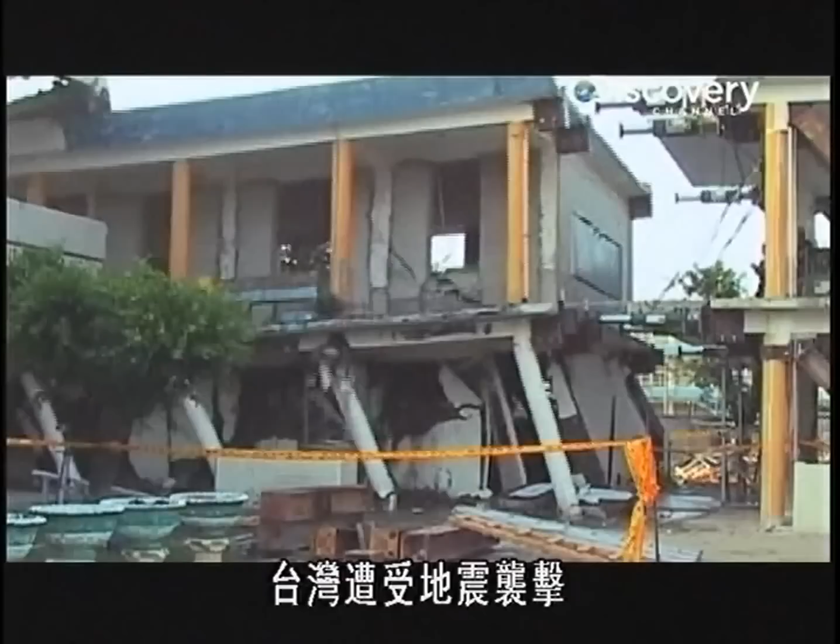Taiwan is under attack. Unpredictable forces of nature threaten the ambitions of this Asian economic giant. To fight back, the island's best minds race to deliver innovative ideas.

High-tech factories that manufacture ultra-safe building blocks and assemble them ultra-fast.

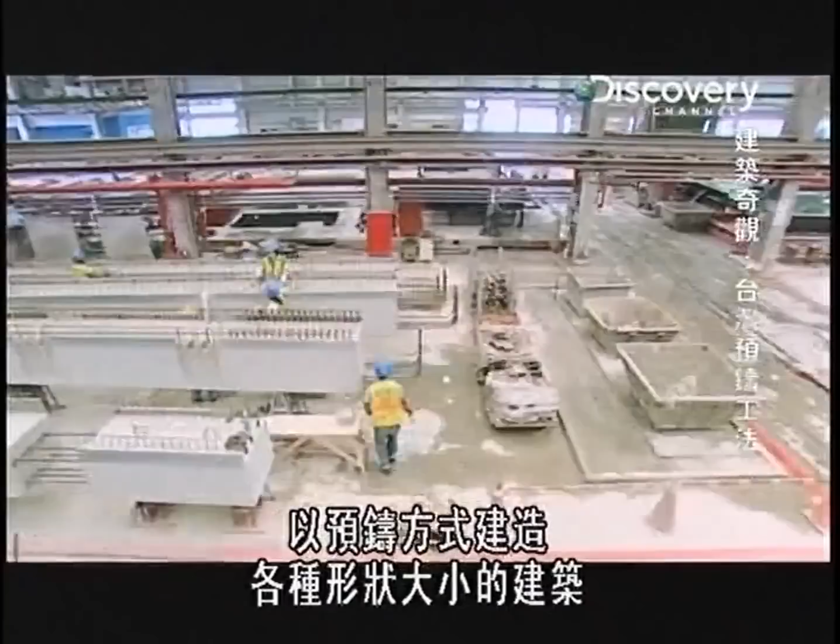Now, Taiwan's unconventional construction method faces its ultimate test: how to prefabricate buildings of all shapes and sizes. A billion-dollar high-tech factory, a 22,000-seat stadium, and a towering 38-story residential block.

Tempestuous weather, near impossible deadlines, and the constant threat of earthquakes combine to make the engineer's job even tougher. This is like Lego, but it's a million times harder and bigger. If they succeed, Taiwan's prefab magic will become a man-made marvel.

Taiwan, a mountainous island more than 30,000 square kilometers in size, home to 23 million people. Rapid industrialization in the late 20th century transformed it into an Asian economic giant. Its foreign reserves are now among the world's largest.

But Taiwan's growing economy is vulnerable. The island is continually attacked by one of nature's most destructive forces, earthquakes. We have about 200 earthquakes of magnitude 5 every year, and then perhaps we have an earthquake of magnitude 6 about every 3 or 4 years.

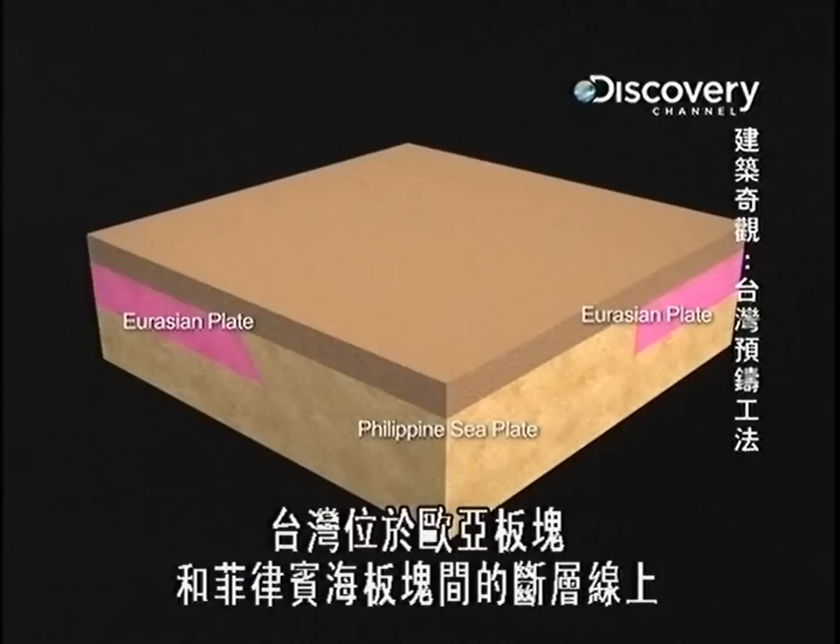Taiwan's geological instability is due to its position on the Earth's crust. It sits precariously on the fault line between the Eurasian and the Philippine Sea plates. Constant movement between these two creates powerful shock waves, producing the many earthquakes experienced by Taiwan, dangerously exposing its densely populated cities to potential devastation.

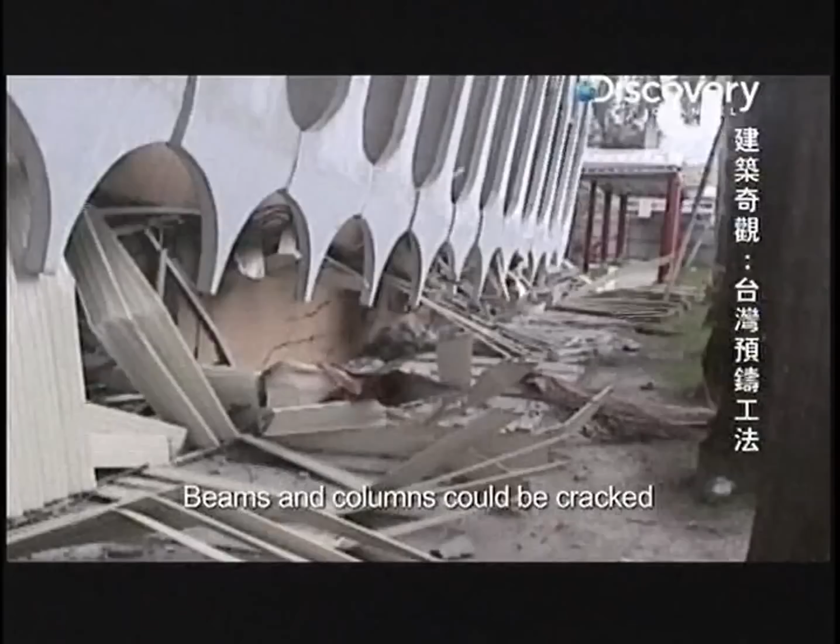Many buildings may not be sufficiently strong enough to resist the earthquake force. Beams and columns could be cracked, and even more seriously, buildings could collapse, causing loss of lives.

September 21st, 1999: Taiwan's worst nightmare came true. A massive earthquake, more than 7 on the Richter scale, strikes the small town of Chi-Chi. It's so powerful that it even rocks Taipei. In the end, more than 2,000 people lose their lives. The disaster, named the Chi-Chi earthquake, cost Taiwan around $9 billion in infrastructure damage.

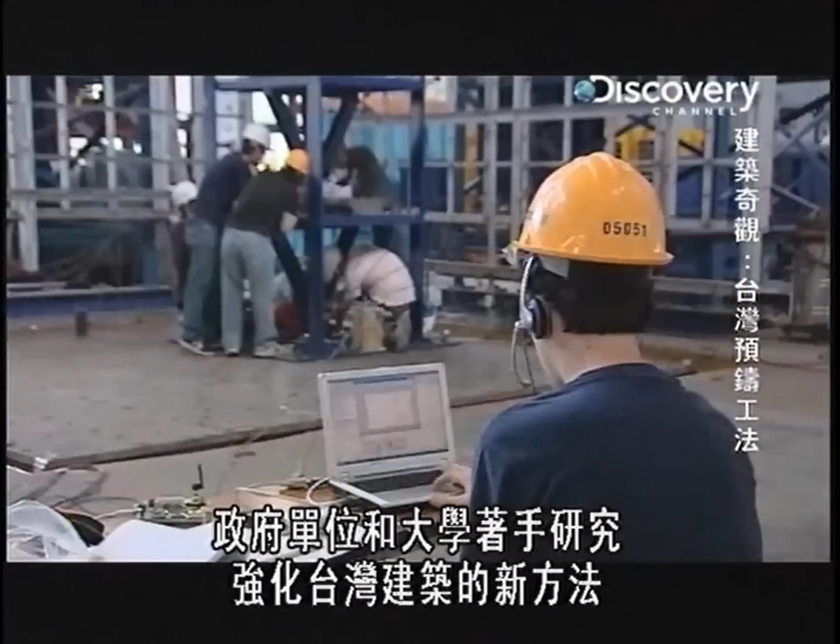Coming up with stronger building methods is now Taiwan's immediate priority. Government agencies and universities begin exploring innovative ideas to strengthen Taiwan's buildings. Multi-million-dollar city icons like Taipei 101 spare no expense to arm themselves with state-of-the-art anti-earthquake devices.

Amongst the many individuals working to create unique solutions is engineer Dr. Samuel Yin.

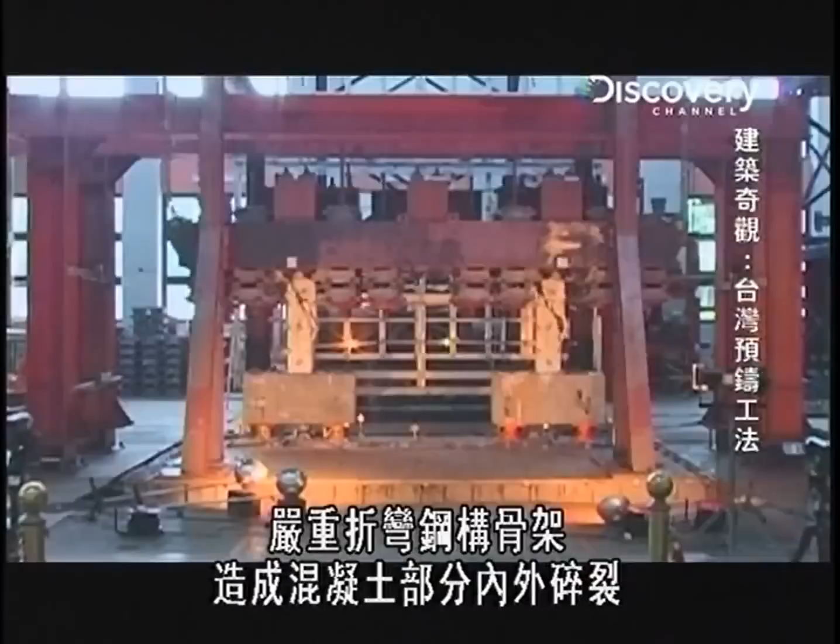Dr. Yin is quick to identify the source of a building's vulnerability when facing an earthquake: it's columns and beams. An earthquake attacks them with its powerful lateral movements, violently bending their steel skeletons and causing the concrete bodies to shatter inside and out. As soon as they collapse, the building they hold up is as good as finished.

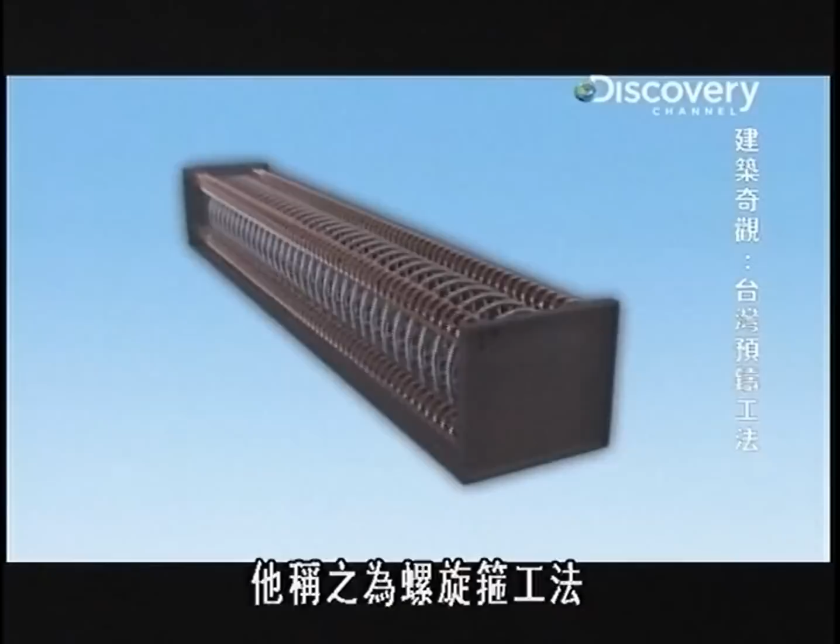The Yin Spiral is twice as stiff to keep its shape during the fiercest quakes. It can also dissipate energy more evenly to keep the concrete around it intact, preventing the building it supports from collapsing.

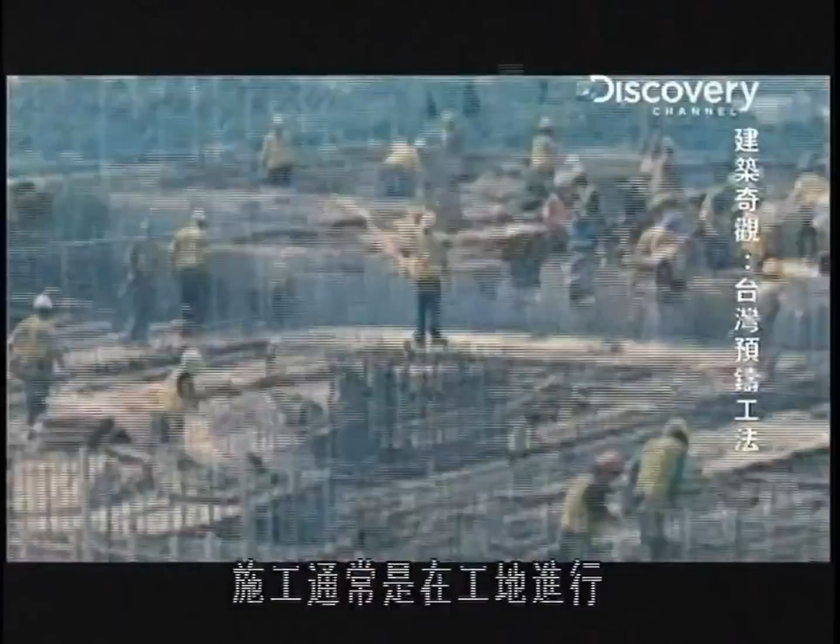But turning Dr. Yin's unique design into a reality is easier said than done. Construction normally takes place on-site, exposed to erratic weather conditions, and prone to human error.

Dr. Yin turns to the magic of prefabrication, or prefab construction, for a faster and more accurate alternative. Unlike traditional construction, prefab takes place indoors where the climate is controlled, making the work super fast and hyper efficient.

The finished building blocks are then assembled rapidly on location. It's like putting together a mega Lego set on steroids.

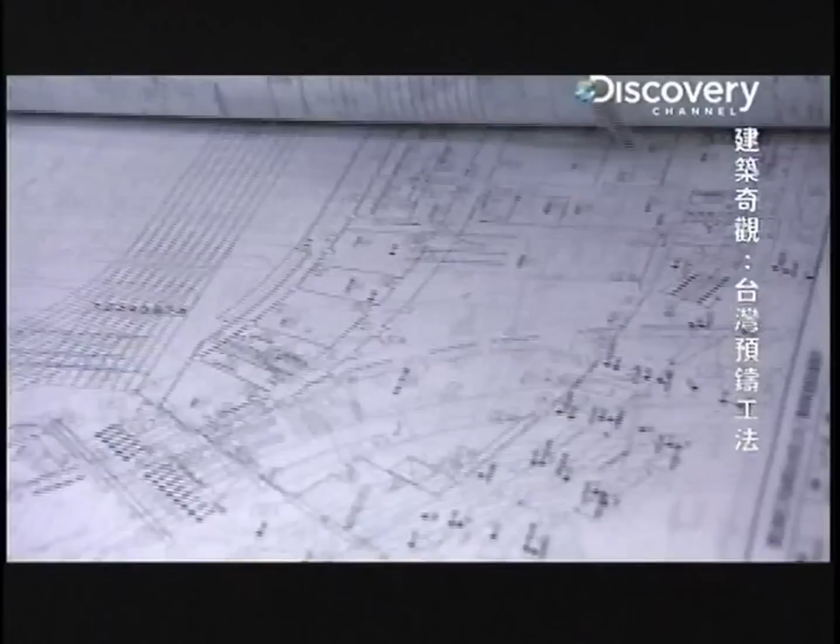Tough deadlines, the unforgiving Taiwanese terrain, and the threat of typhoons will take engineers to breaking point. Will success seal their reputation as Taiwan's genius builder?

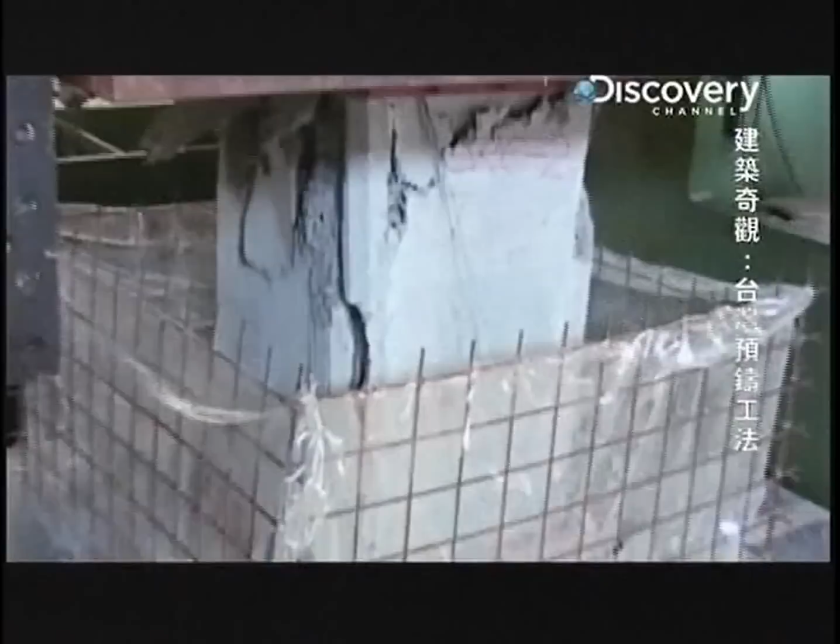Taiwan, home to one of the world's largest prefabrication factories. The giant work floor, 10 soccer fields in area, manufactures concrete blocks for mega buildings, ultra fast and ultra strong. Unlike conventional structures, these prefab buildings can also withstand the most violent earthquakes.

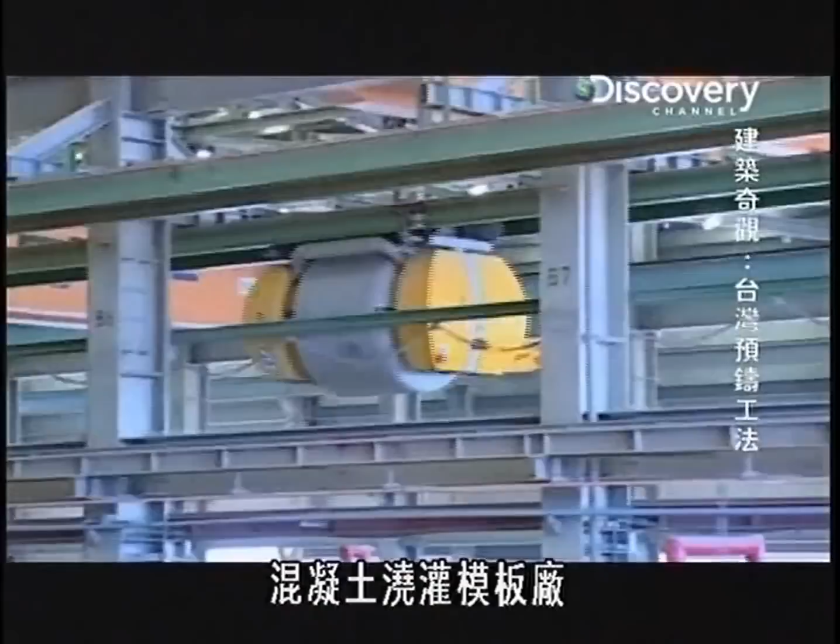The secret to this factory lies in its finely tuned 3-stage process. The steel shop, where high-grade steel is cut and bent into shape. The assembly line, where the steel skeletons of prefab building blocks are put together. And a concrete casting and molding facility, where the mega building blocks get their final shape, ready for delivery.

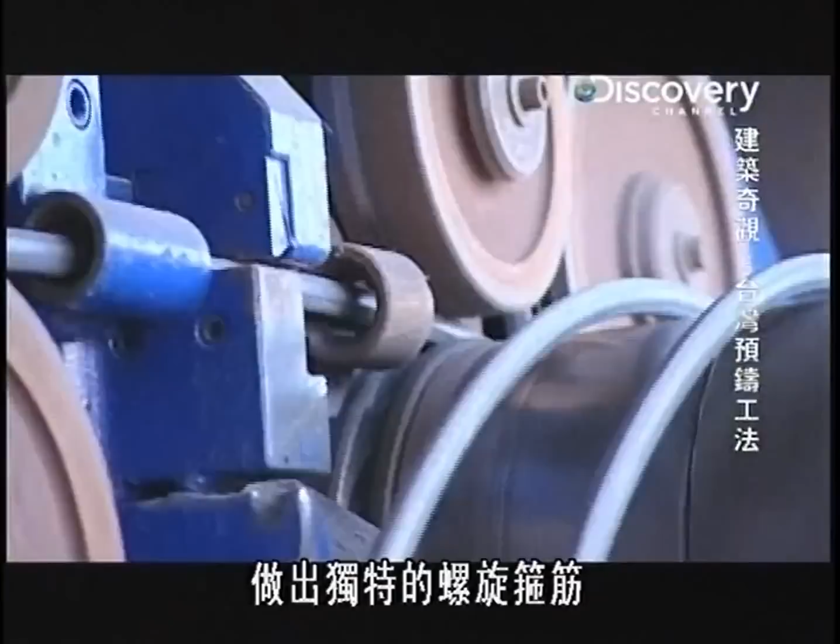Operational efficiency is crucial. But it's the ingenious machines that give production an edge. Giant spring manufacturing equipment churns out unique steel spirals that form the skeleton of columns and beams. It's an eco-friendly process that reduces the demand for raw steel by 30%.

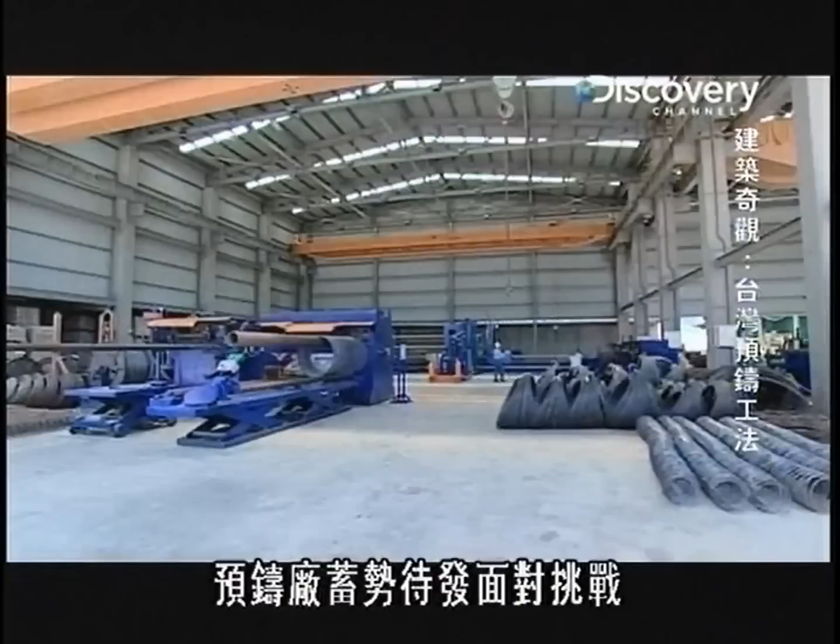The factory is geared up for the challenge ahead. Time now to turn theory into practice. Are they up to the task? To prefab 3 massive buildings of different sizes and shapes in record time. The Taipei Stadium, the 38-story Ocean Blue condominium, and the largest of all, the 600,000 square meter Innolux plant.

Innolux is a homegrown liquid crystal display manufacturer in Taiwan's rapidly growing IT industry. The billion-dollar business is one of Taiwan's most important exports. For companies like Innolux to stay competitive, they require high-tech factories to assemble their sophisticated products. The faster they get their factory built, the earlier they can generate income.

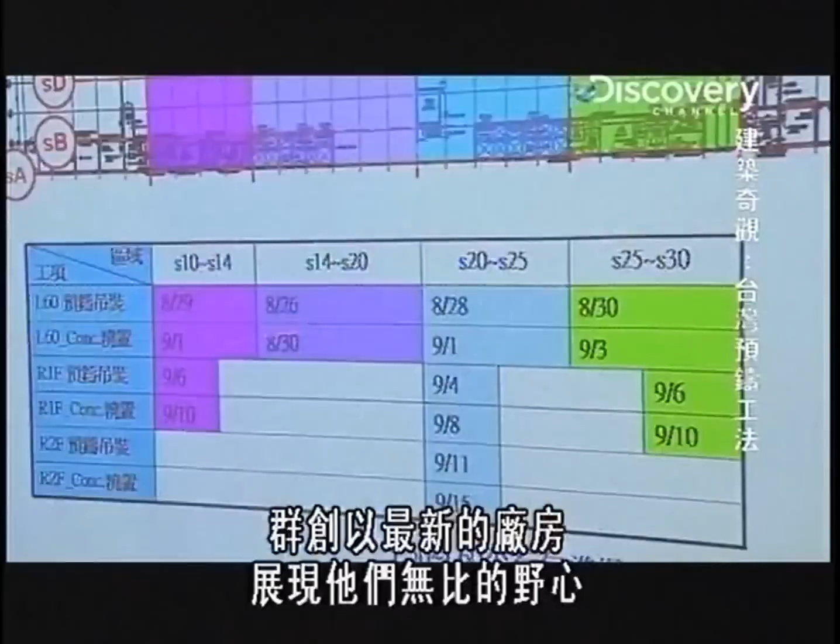Innolux's latest factory is their most ambitious to date. In 12 months, engineers have to complete the building and also make it earthquake-proof to protect the factory's sophisticated equipment. It's a punishing set of challenges that no standard building methods can meet. Except for prefabrication.

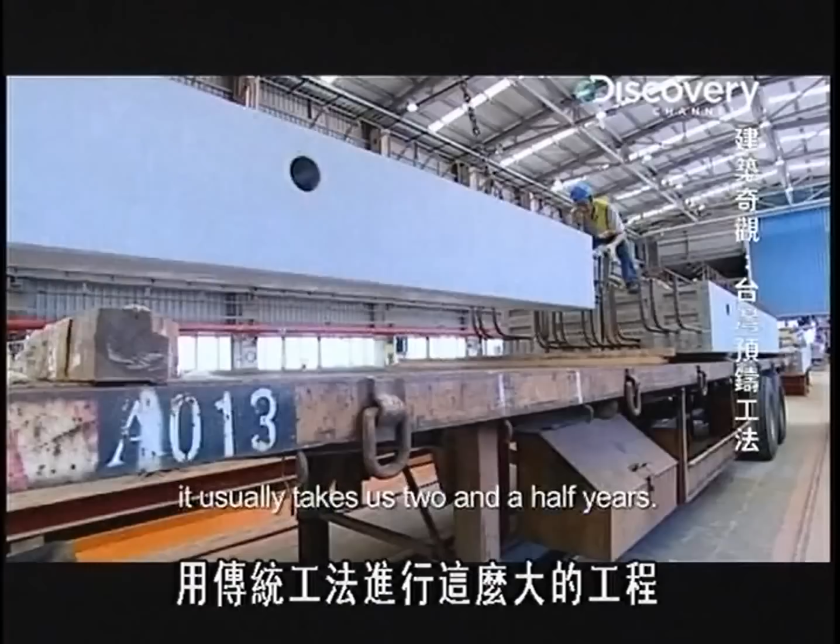Here we have the rebar cage. Engineer Mo is in charge of constructing a building that's up to the job. You know, in the conventional way, if we want to build such a big project, we usually take 2.5 years. Now we only take 1 year.

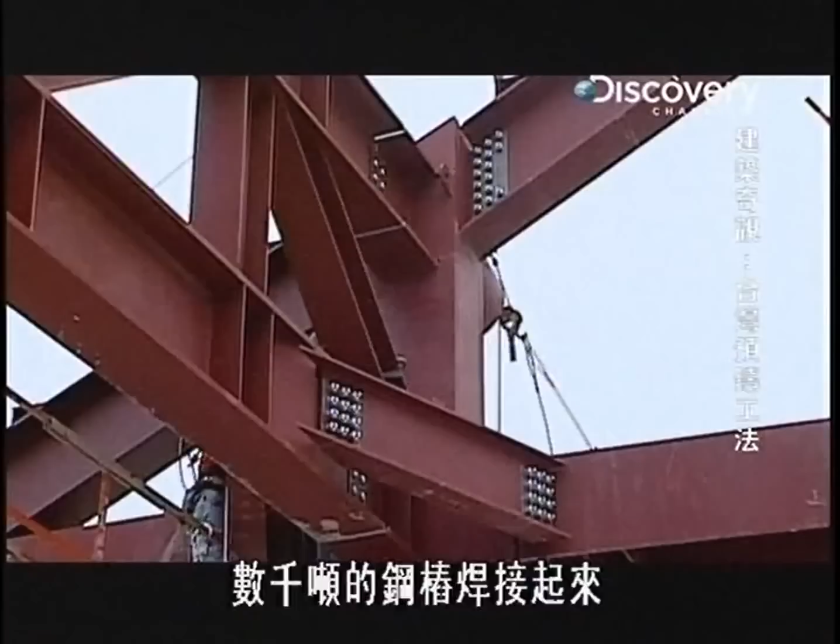Work starts on the plant's massive foundation. Engineers excavate a gigantic area measuring 100,000 square meters. Thousands of tons of steel piles are welded together to form the building's 6-story framework. But these are the easy parts. The biggest challenge is to tailor-make the floors of the plant's largest cleanroom facility.

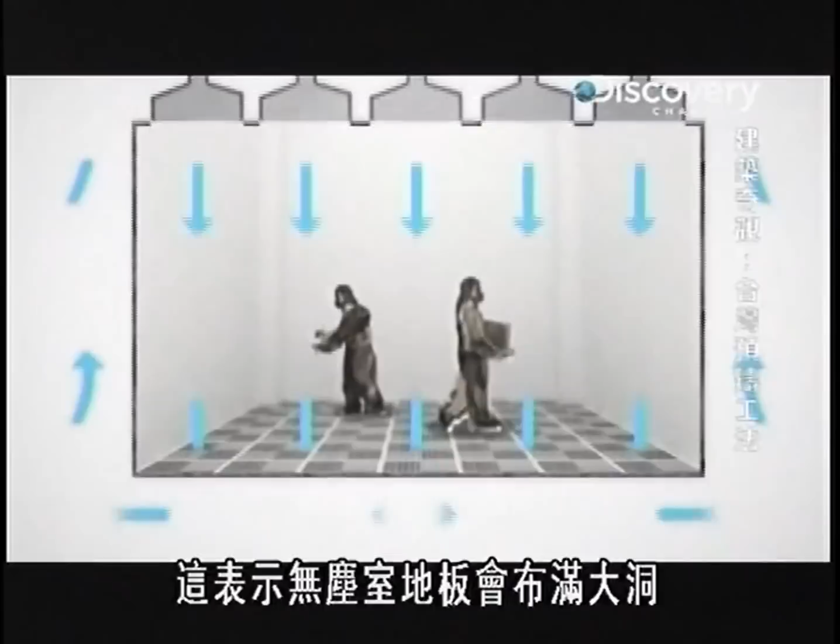Cleanrooms are the most important part of the factory. They prevent environmental pollutants like dust or microbes from ruining the microchips that Innolux manufactures. Inside, a filtering system controls air contamination levels through multiple ventilation points built into the floor. This means that cleanroom floors are riddled with large holes. So how do you construct a giant floor filled with hundreds of holes while making it earthquake-proof?

The engineer's plan is to split the cleanroom's 48,000 square meters of flooring into 1,800 smaller sections, making them easier to prefabricate. Then, to strengthen each piece, they will double the amount of steel and concrete. At the same time, a massive net of steel will form the frame of the floor, holding the pieces together. In this way, the customized floor is strong and stable enough to withstand the most violent quakes.

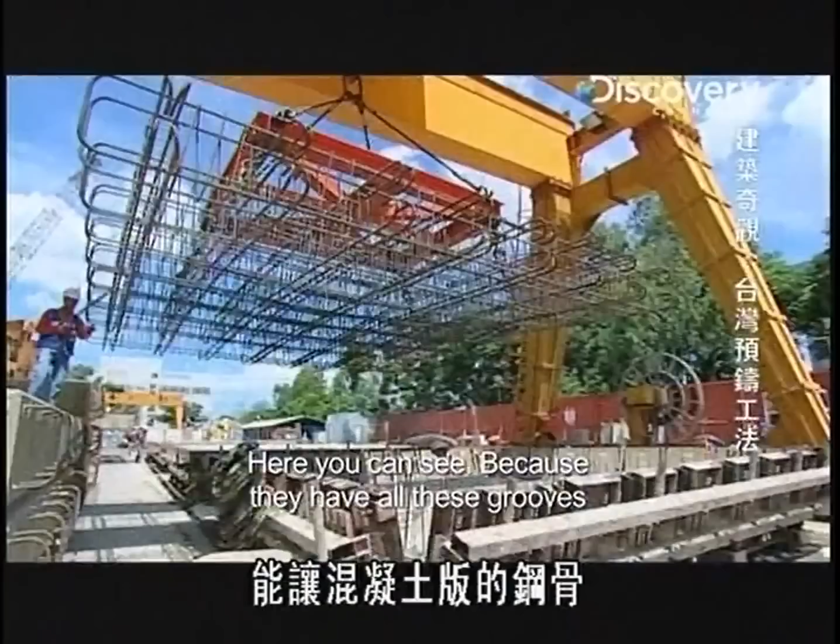With the perfect plan in place, the prefab factory now needs to build the perfect floor. First, a crack force of craftsmen binds the steel skeleton of each floor slab together. The work is fast-paced and done entirely by hand. And then we put this skeleton inside of the mold. Here is the mold. Here you can see they have all these grooves, and all the skeleton of our concrete slab will be fixed into the right location.

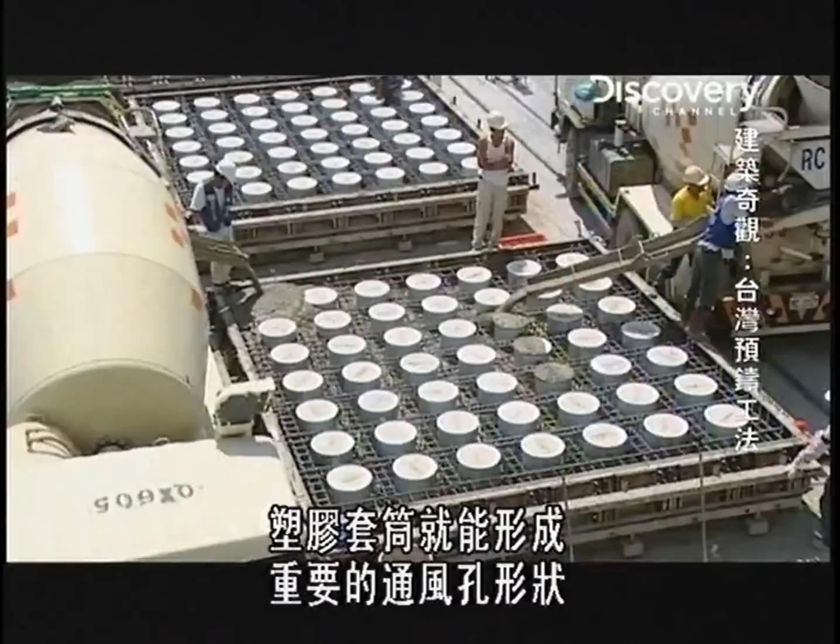After the skeleton is inside, we put the bucket inside here, and then we cast the concrete. As the concrete is poured into the mold, the plastic buckets help to form the shape of the vital ventilation holes. With just 22 molds, the factory is able to prefab all 1,800 floor pieces in less than 3 months. And because we have to insert all these tubes to get the ventilation, it looks like a cheese, so we call it cheese slab.

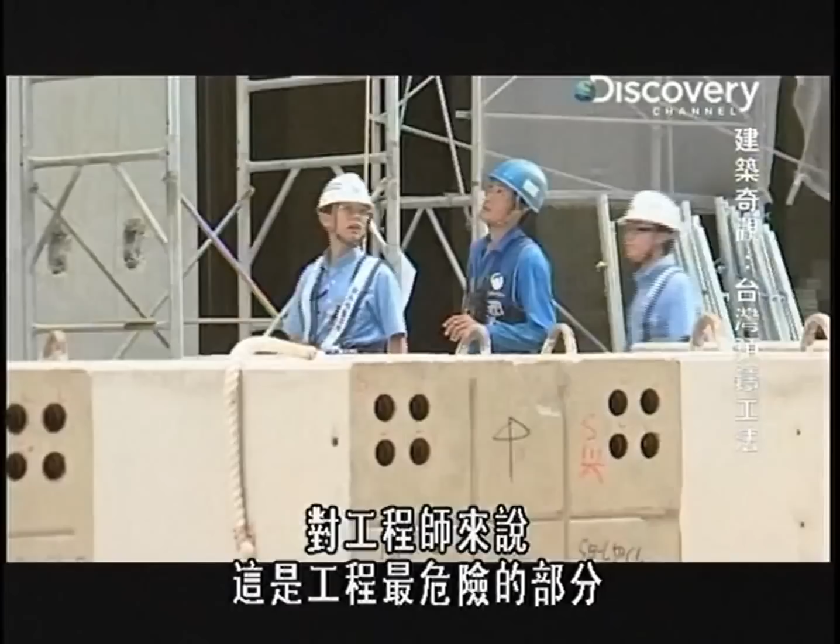The last stage of the process is to install each of the 25-ton floor slabs. Not on the ground floor, but 4 stories up. For engineers, it's the most dangerous part of the construction. The most dangerous thing is, you can see, for this 25-ton slab, we have to lift it up to about 30 meters height and insert it into the about 10 meter narrow gap.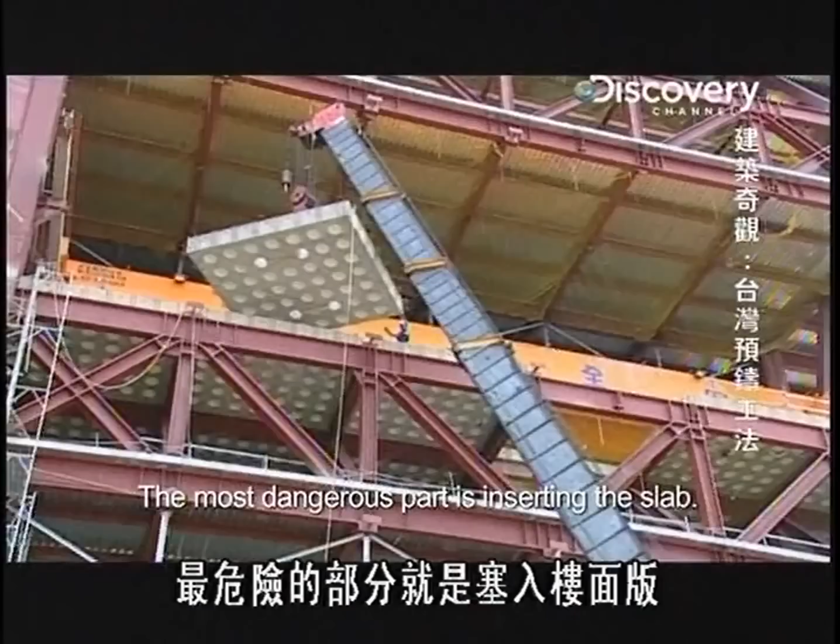You can see, now it's up to the right floor, and we have to get that one into that one. The most dangerous part is inserting the slab. If it doesn't make properly, then we have a big problem. This is a big disaster. After a harrowing half an hour, and with only inches to spare, the slab rests safely at the top and is moved into position.

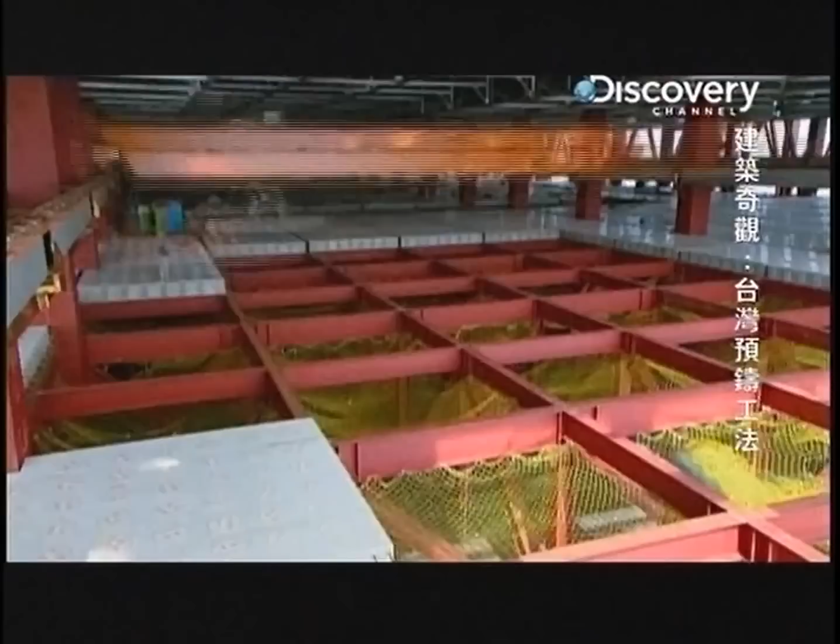Over 10 months, engineers install thousands more floor slabs and put the finishing touches to the factory. Completion of the project is at last a success. This is an exciting experience for me because we had to finish this big project in such a short time. And the precast helped us to accomplish this mission.

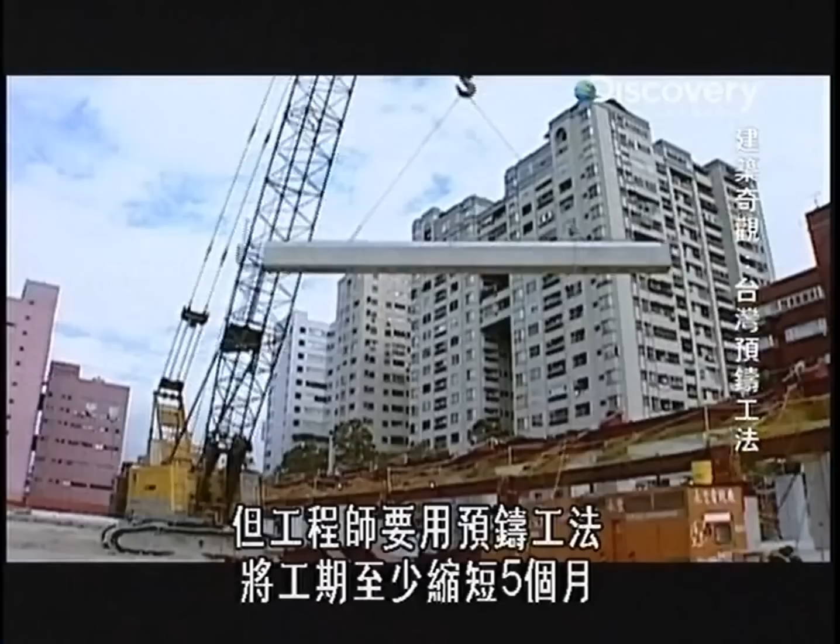With the Innolux plant completed, engineers turn their attention to another mega project, the $70 million Taipei Stadium. It usually takes over 30 months to build a stadium this size. But engineers are going to use prefab to shave more than 5 months off the schedule. If they succeed, it will be the fastest stadium ever built in Taiwan. Only one problem.

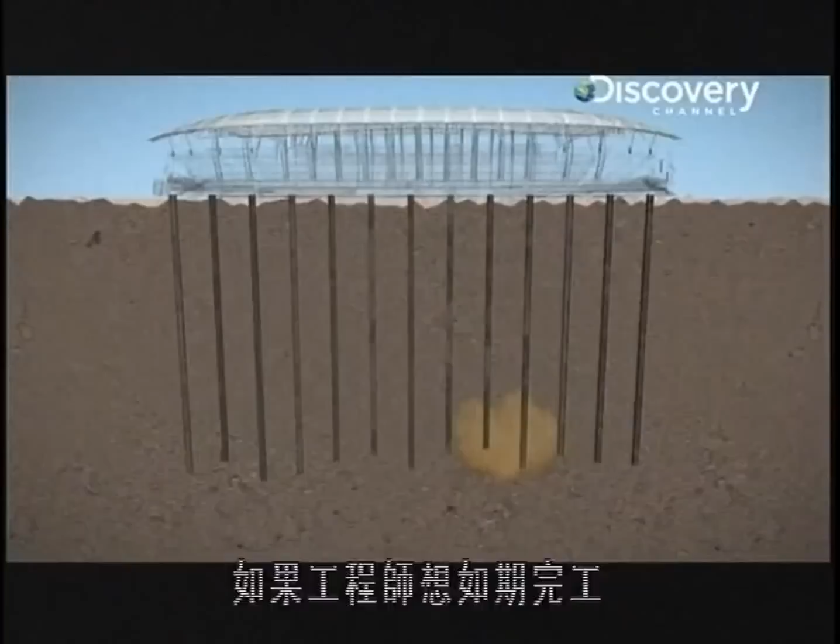The city of Taipei sits on some of the softest soil on the island. A condition made worse by an extremely high water table that rises during the annual typhoon season. If engineers want to get the stadium ready in time, they will have to prevent it from sinking into the ground.

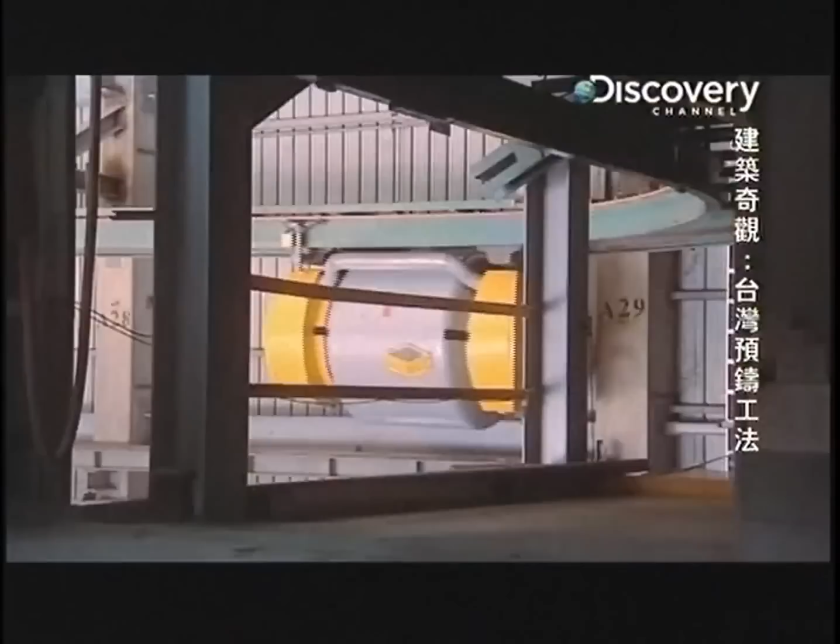Homegrown innovation has been the powerhouse that's propelled Taiwan into the future. The island's largest prefabrication factory is attempting its most ambitious projects to date. Constructing 3 mega buildings in record times. Engineers took just 1 year to complete the massive 600,000 square meter Innolux plant. Now they turn their attention to their next 2 missions.

The 38-story Ocean Blue condominium and the 22,000-seat Taipei Stadium. Commissioned specially for the 2009 Deaflympics, the stadium has to be ready in less than 25 months. It usually takes more than 30 months to complete something this big. If engineers succeed, they will make construction history. Engineer Zhang leads the project.

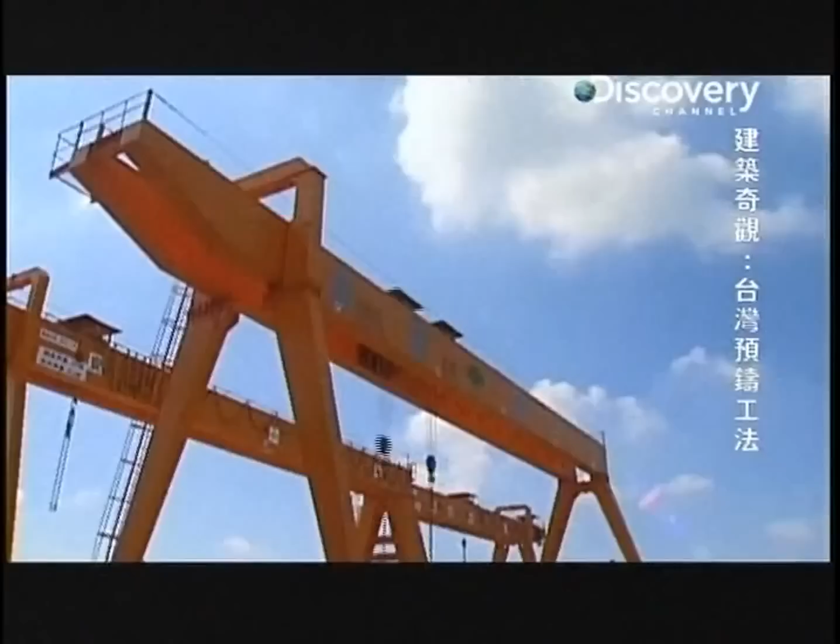Back at the prefab factory, engineers customize the stadium's 900 seating slabs. Specially designed molds of different sizes and shapes churn out the 15-centimeter thick parts. This way, 16 seating slabs can be completed in a single day. A feat conventional methods will find hard to beat.

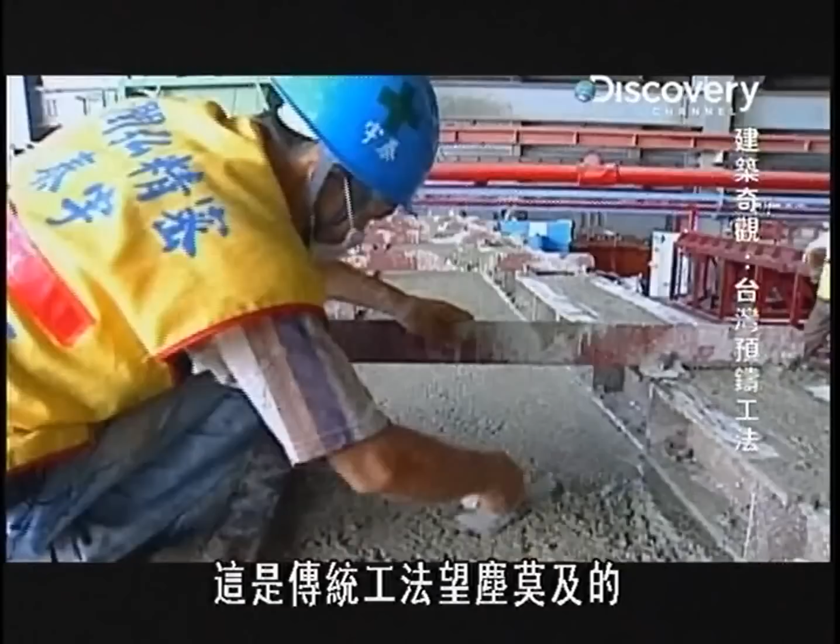More than 40 steel trusses are also prefabricated to form the stadium's roof, each weighing 35 tons. Everything is ready to be assembled. But first, engineers have to overcome a sticky problem that could ruin their foundation. Soft clay. This unstable soil underlies Taipei because the city sits on a basin. And as the basin is intersected by 4 rivers, the soil also suffers from a high water table, just 2 meters beneath the surface.

Complicating the problem even further is the threat posed by the engineer's deadliest foe: earthquakes. Because the city of Taipei has a thick layer of soft soil, when an earthquake comes, the earthquake wave will pass through this thick layer of soft soil, and some of the earthquake waves will be amplified. Therefore, the building built on this layer of soil could suffer serious vibrations.

For engineers to complete the stadium in time, they need a solution that will both stabilize their soft foundation and counter the threat of an earthquake.

Prefabrication can't help engineers in this situation. They need to come up with an alternative solution. One option is to drill steel foundation piles deep into the earth. But it's a time-consuming process, and the amount of steel needed makes it an expensive scheme. What's worse, an earthquake or a hidden pocket of clay could destabilize the steel piles, causing part of the stadium to collapse.

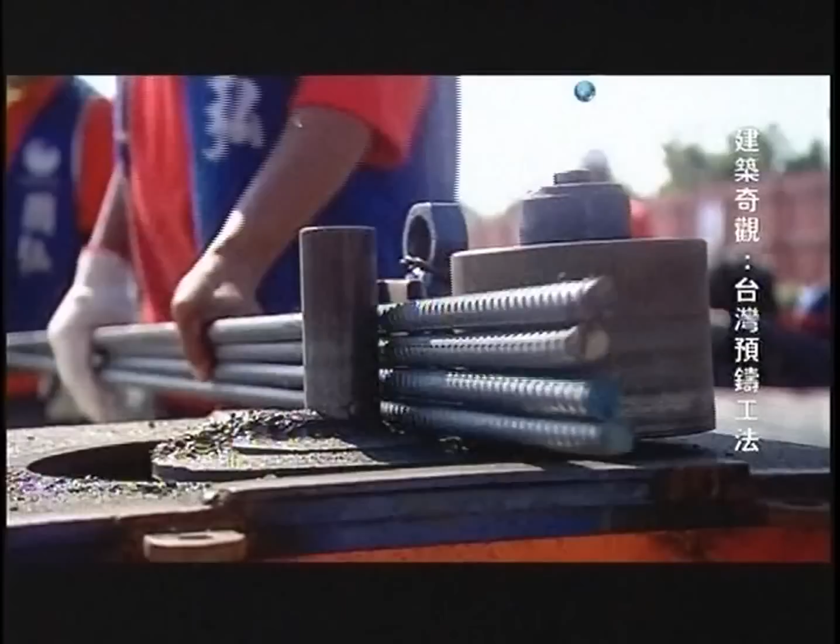Engineers turn to a conventional but highly effective technique to tackle both problems. Mat foundations. Engineers will excavate close to 5 meters down until they hit sand, a stronger and heavier material than clay. Then they'll place a bed of steel onto the sand, reinforced with concrete, creating a mat foundation.

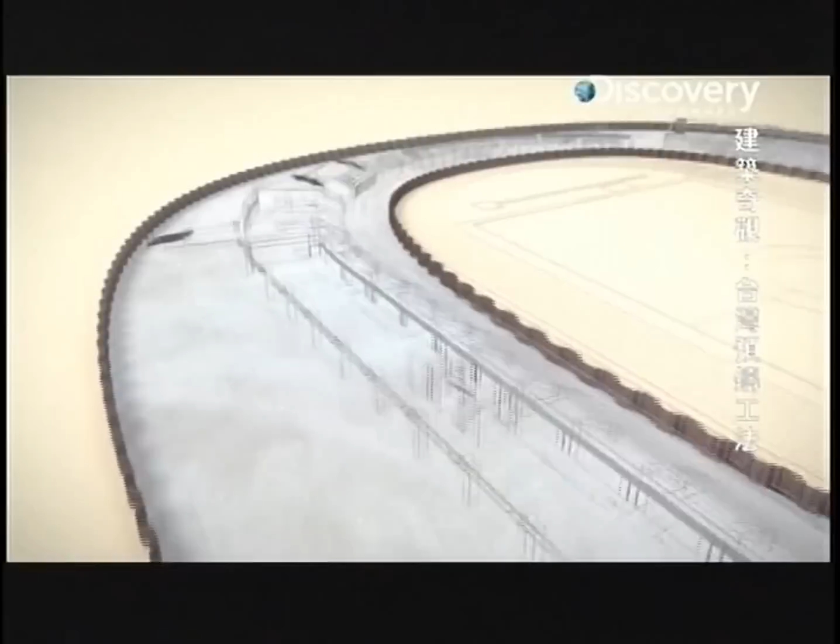By building countless mat foundations around the 600-meter circumference of the stadium, the weight of the structure is distributed evenly across and under the site, allowing it to sit undisturbed within the soft clay and high water table. Even if an earthquake hits, the stadium will move as one in the soft soil, just like a ship floating at sea.

Work begins. First, engineers construct a series of waterproof steel structures called cofferdams. These temporary structures surround the worksite with a wall of steel sheet piles, making it safe to work inside. Then they assemble the steel skeleton of the mat foundation. Workers pour tons upon tons of fast-setting concrete to give the foundation its final shape.

But before engineers can finish their work, disaster strikes. The annual typhoon season hits Taipei. A Category 2 typhoon makes landfall east of the city, causing flash floods and landslides, clocking wind speeds of more than 180 kilometers per hour. At the stadium, almost all the cofferdams are inundated with rain. It's a major setback for the crew.

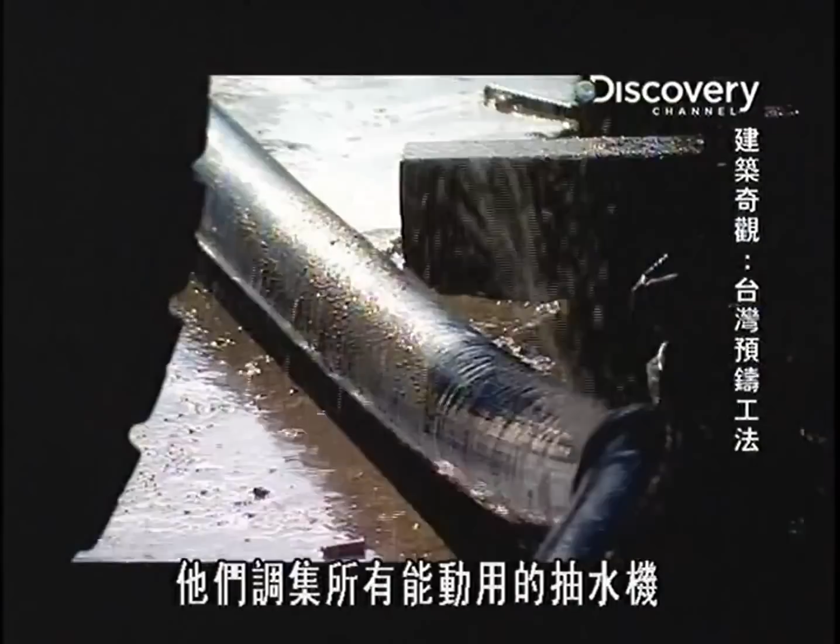Engineers work non-stop to come up with the most efficient salvage plan. They use every pump at their disposal to discharge the water from the cofferdams.

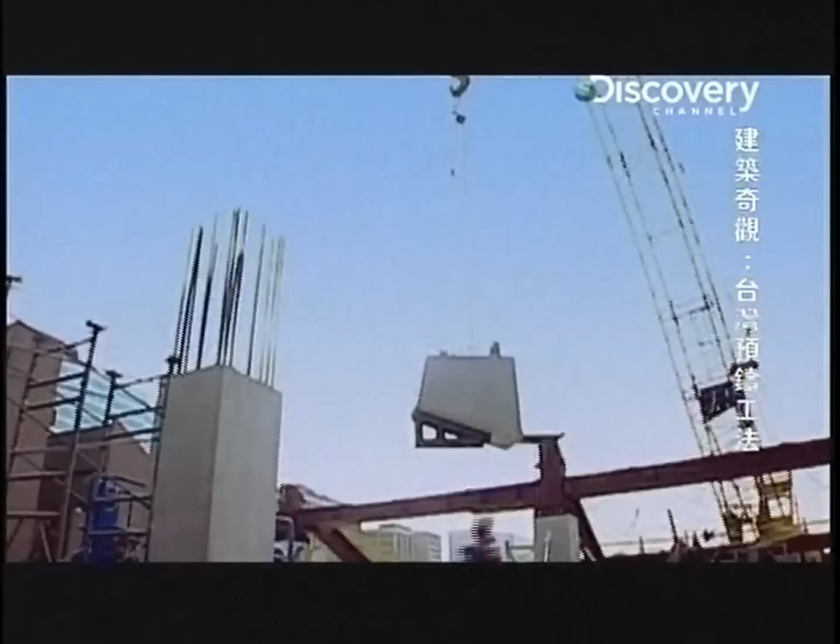Engineers overcome the potential disaster. Now they begin to assemble the rest of the structure at breakneck speed. The stadium's 900 seating slabs go into position in just 2 months. 3 men and a crane are all it takes to get the job done. And after bolting its massive roof trusses into place, Taipei Stadium begins to take its final shape. Engineers have successfully met their tight deadline.

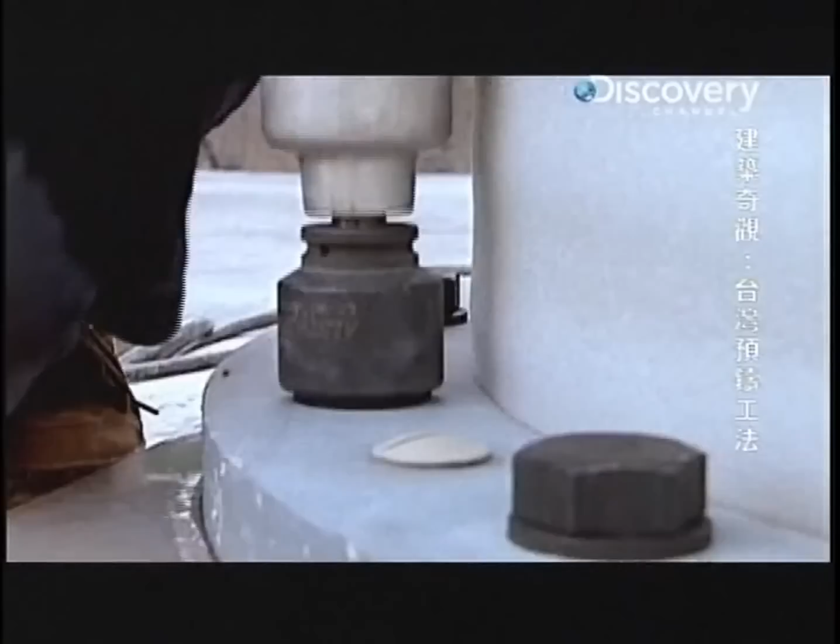With the stadium complete, the prefab factory begins work on another giant project: a towering luxury condominium called Ocean Blue. At 38 stories, Ocean Blue will be the tallest prefab building in Taiwan, constructed in less than 2 years. Almost immediately, engineers face a major challenge. To make such a tall building earthquake-proof, they will have to build structural supports of near impossible dimensions.

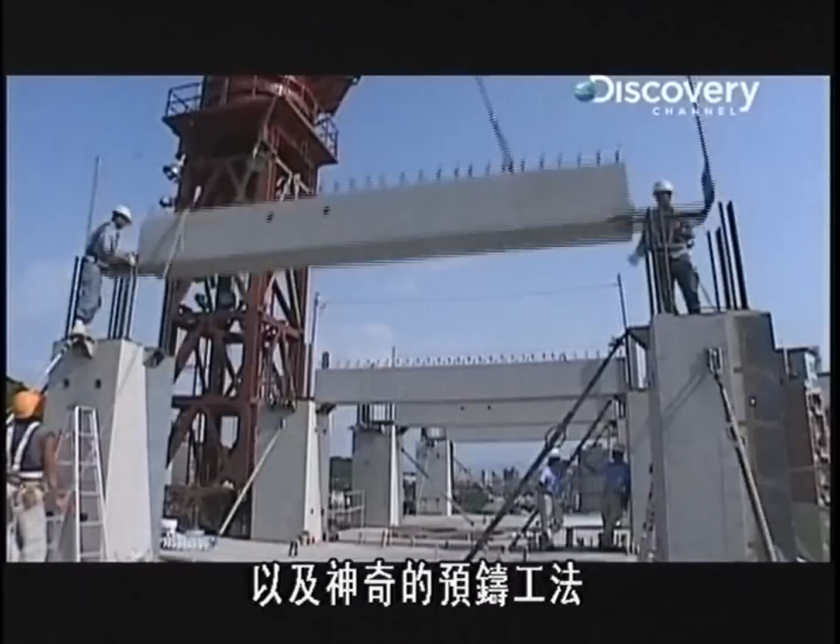If we use a conventional method, definitely you will have a big column and a big beam. That will cost a lot of money, and because the big column and the beam will occupy a lot of space, it's not good for a residential building. Engineers need to bring on state-of-the-art anti-earthquake technology and the magic of prefabrication to create this residential paradise by the sea.

Behind the bustling, prosperous facade of one of Asia's economic powerhouses lurks a constant threat. Taiwan is at the mercy of one of nature's most powerful forces: earthquakes, some measuring more than 7 on the Richter scale. To protect its people and its cities, Taiwan turns to advanced building technology. Prefabricated construction could be the answer.

A massive factory creates high-quality concrete building blocks with production line efficiency, and then assembles them rapidly on site. Armed with a super tough steel skeleton, these blocks are strong enough to withstand an earthquake. Engineer Dr. Samuel Yin is proud of his achievements.

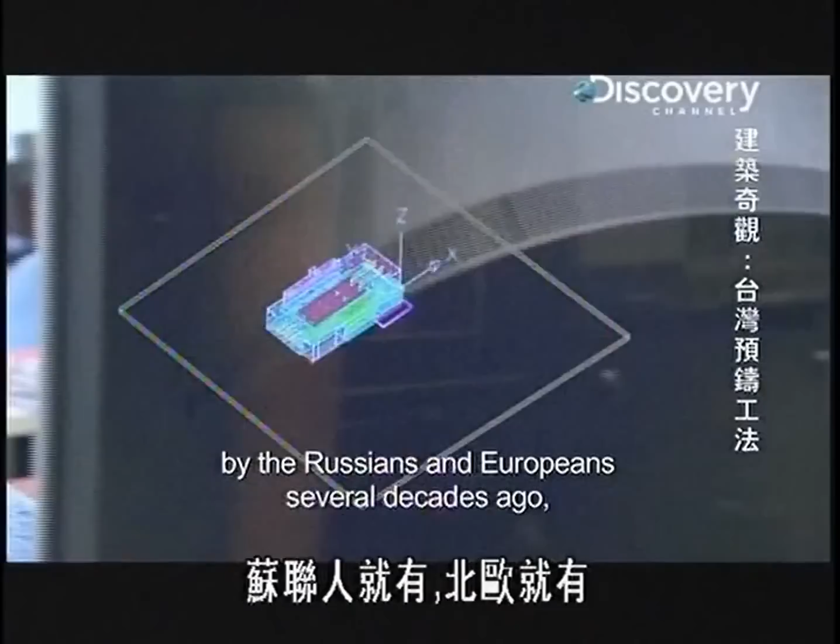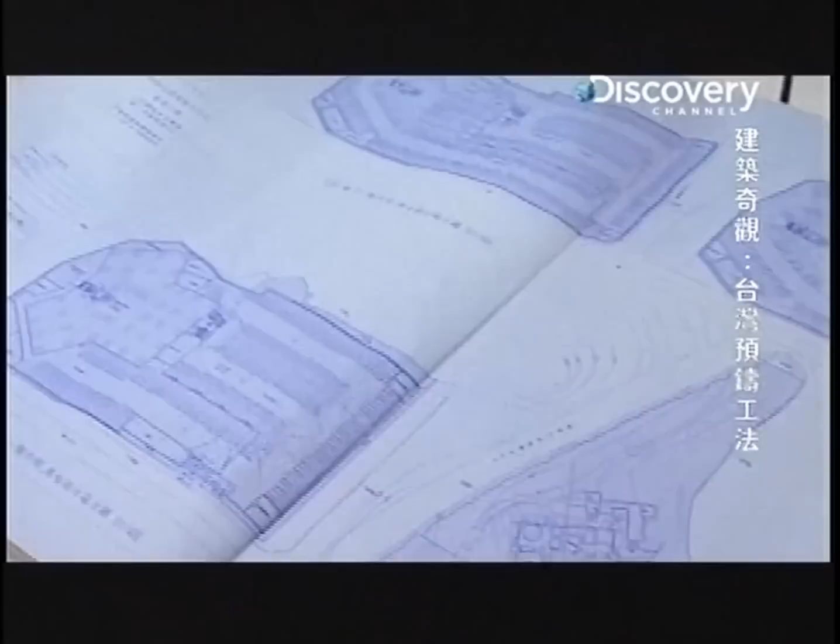Taiwan's largest prefab factory is now facing its biggest challenge to date: building one of the city's tallest residential blocks, the 38-story Ocean Blue condominium. Engineers there are trying to overcome their first hurdle. As expected, the higher you go, the tougher it is to defend the building against earthquakes.

To make Ocean Blue earthquake-proof, engineers will have to produce columns of impractical dimensions. They will be too expensive to produce and take up too much space in the structure. Engineers have to figure out a more practical solution. Because earthquake is the most critical issue in Taiwan, so we must build this structure earthquake-proof.

Advanced bridge building technology may provide the key: seismic isolators. Invented by New Zealand scientist Dr. William Robinson in the 1970s, seismic isolators are used in bridge construction to dissipate earthquake energy by up to 90%. Installing them under Ocean Blue could help minimize the size of its structural supports.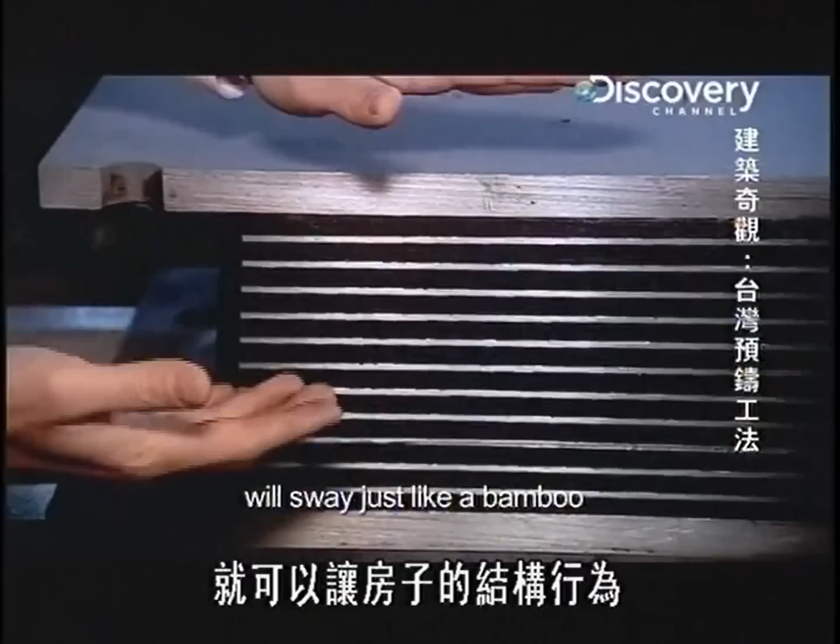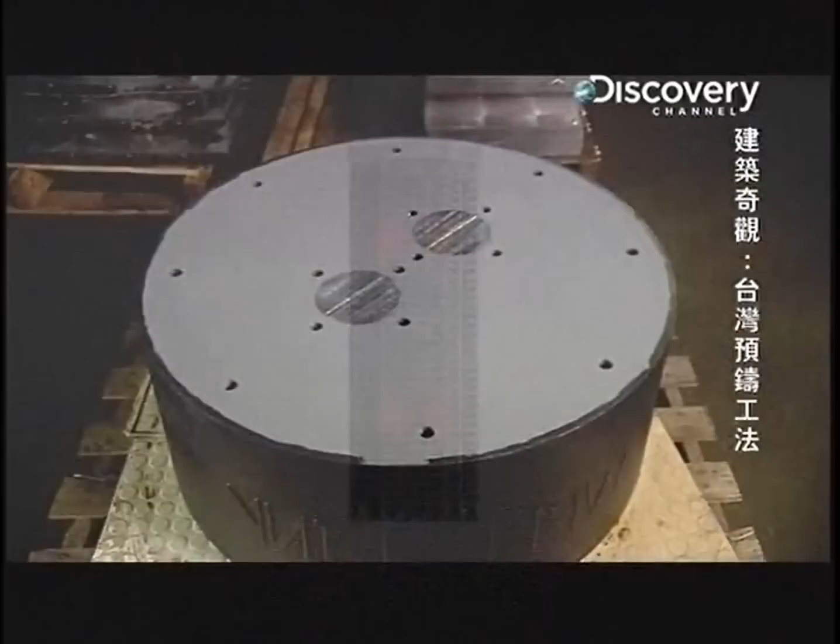The secret behind this incredible invention lies within each isolator. Inside, layer upon layer of elastic rubber is sandwiched between powerful steel plates. They serve two purposes: to form a padded compact block to support the pressure of a building above it, and to maintain the shape of cylinders made out of lead, which is both dense but flexible. When an earthquake hits, the lead bends and adjusts easily with its lateral forces without fracturing, absorbing the energy and distributing it away from the supports of a building.

It sounds like the perfect answer, but Ocean Blue engineers need to be sure. So they put the isolator through an earth-shattering test. Engineers plan to apply 140 tons of pressure to stress and strain the isolator laterally, adding another 1,200 tons of vertical force to simulate a section of the building's weight.

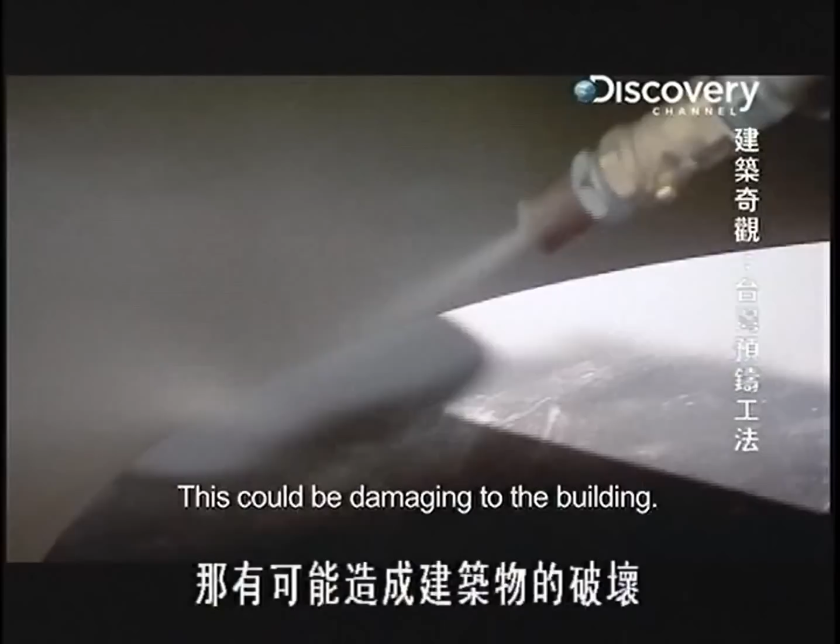The test begins. Hour after hour, earthquake forces of 7 Richter and more strain the isolator mercilessly.

At the end of the test, the verdict is unanimous. The isolators are ready to be installed. A total of 43 isolators will support Ocean Blue, the largest measuring close to 2 meters in diameter. These are the biggest isolators ever used in Taiwan. After 2 months of careful construction and installation, the isolators are finally in place.

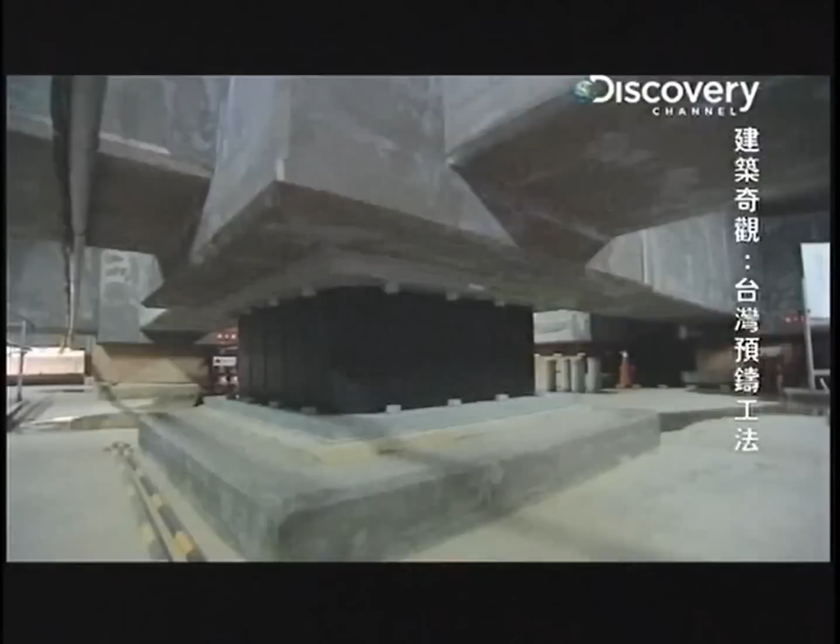This high-strength concrete column and this high-strength concrete base, and between these two structures is isolated. We are very happy we can complete it successfully. With earthquake protection secured, engineers can now focus on prefabricating the rest of the structure. Conventional methods require 2 weeks to complete a floor. With prefab, each floor can be assembled in a record 8 days.

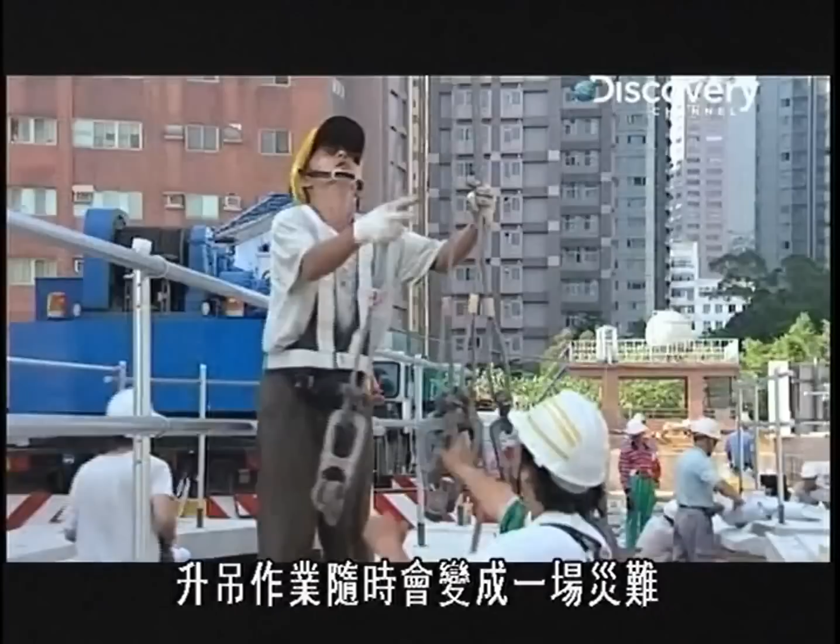But engineers cannot afford to be complacent. Ocean Blue is located on the coast of the Taiwan Straits. Gusts of wind here can hit speeds of more than 20 meters per second, making construction a nightmare. If engineers are not careful, the hoisting operation could easily turn into a disaster zone. Taiwan's destructive earthquakes have finally met their match. The island's largest prefabrication factory manufactures building blocks tough enough to protect structures from an earthquake.

Engineers are racing against time to assemble all 38 floors of the luxury condominium. One thing stands between them and success: the powerful winds of the Taiwan Straits. Ocean Blue is right on the coast. Wind speeds here can reach more than 20 meters per second. The higher engineers build, the stronger the wind, making assembly work a tricky business.

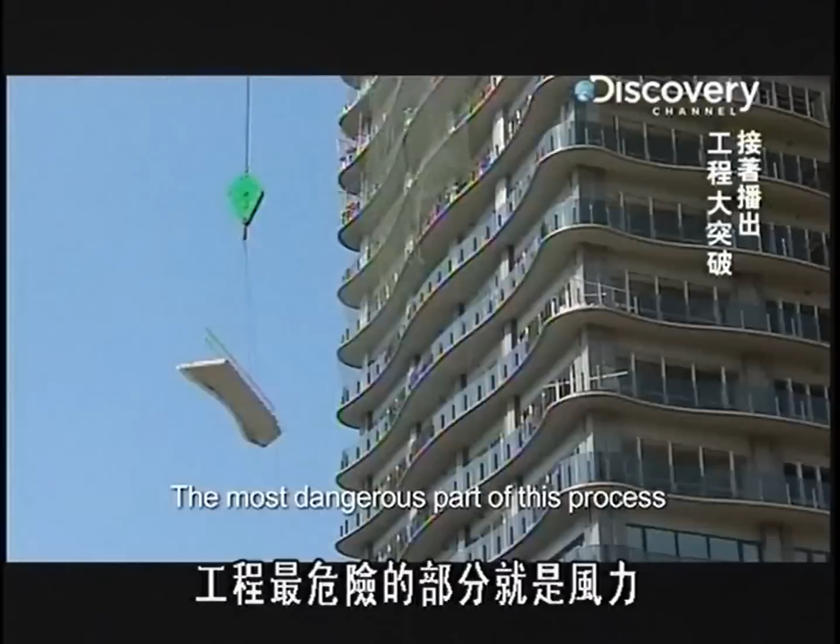For Engineer Lin, it's a weighty responsibility. The most dangerous part of this process, we should consider the wind force. If the wind force is too heavy, too strong, maybe it causes the slab to hit the building. One last floor remains to be assembled. Level 38. Time for some serious lifting grunt. A 440-ton crane will hoist more than 60 balcony slabs and columns, some weighing almost 20 tons.

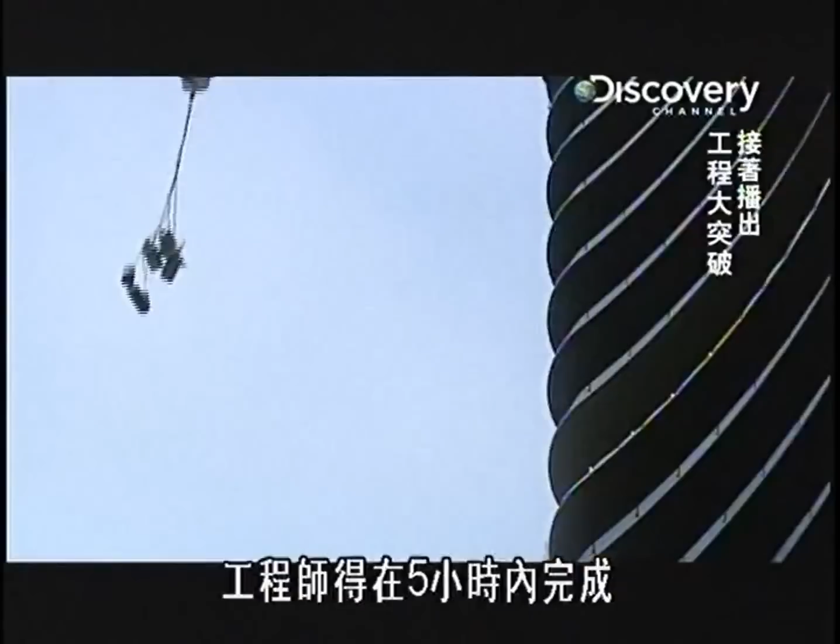It's fraught with danger. And engineers have only 5 hours to get it done. A single mistake or a strong gust of wind can throw the entire operation into chaos. I'm a little bit nervous. We should be quite careful, because there should be no people underneath the slab. If anything happens, it may cause big trouble. Okay, you can see the slab almost go to the top. Okay, let's go.

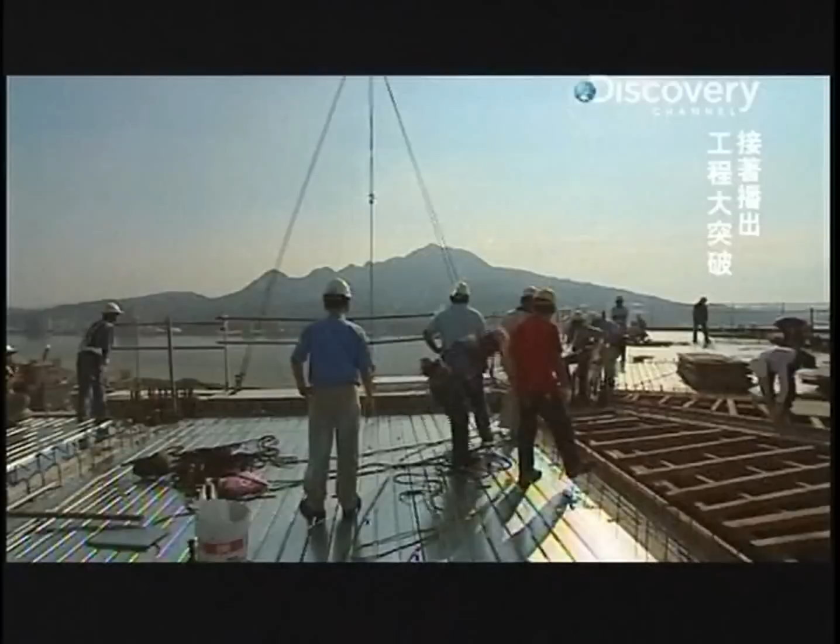On the top floor, a small army of workers assemble the balcony slabs, beams and columns with rapid precision. They know that the longer it takes, the bigger the chance of something going wrong. This is like Lego, but it's a million times harder and bigger. As the 5-hour mark draws to a close, the last pieces of the floor finally make the climb and are welded into place.

With Ocean Blue now completed, Taiwan's largest prefab factory has achieved its goal of customizing its unique method for buildings of all shapes and sizes. Besides creating the towering 38-story luxury condominium, they've also constructed a $1 billion high-tech factory and the 22,000-seat Taipei Stadium. For the factory's creator, Dr. Samuel Yin, success has caught the attention of some of the world's top engineers.

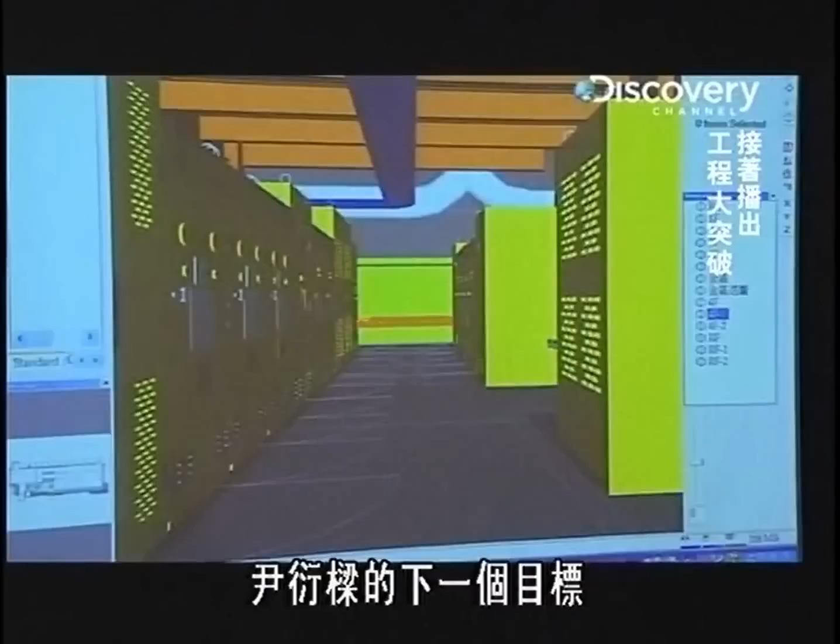A massive 8 Richter quake has laid waste to the province of Sichuan. Thousands of people lost their lives, and millions are left homeless.